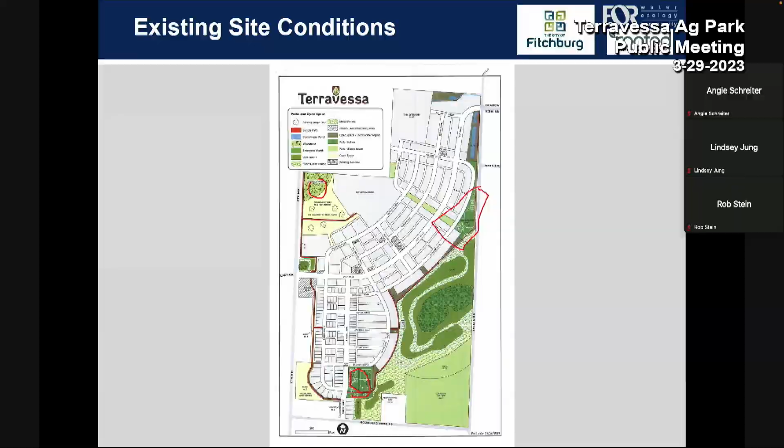We have a smaller neighborhood park down on the bottom, towards the south by Goodland Road. There's a sliver along Larson Road up there. We have a natural area adjacent to the west of the school. And the area we're speaking about specifically is down in the southeast corner, which is our future agricultural park — a unique feature. So hopefully that gave you an overview of the park system, where we're at, and what this presentation will be about tonight.

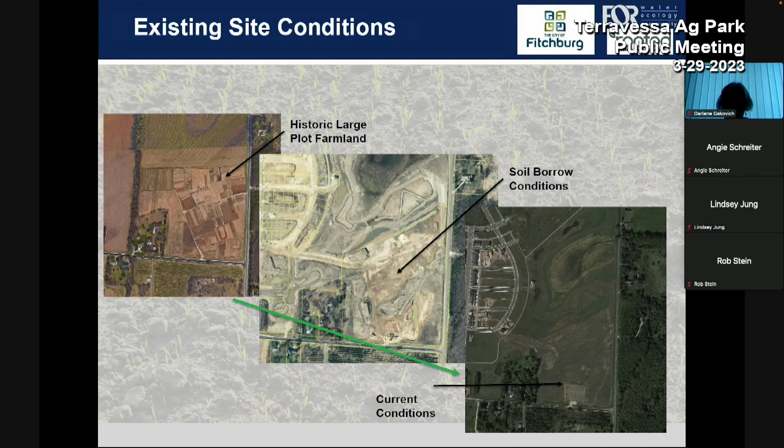On the slide here, you can see the progression—I apologize, it's a little muddy—but you can see the historic large plot farms that were there originally, then the development started, and now it's at a stabilized point where it's been planted, and some of those restored native areas have already been seeded and taken into place.

You can see that from this aerial here, and I'll try to outline it. Much of the borrow area was this portion of the site, and some of the more undisturbed areas would be defined by that space on the more edges of the site. That plays into how we planned the design as we went forward.

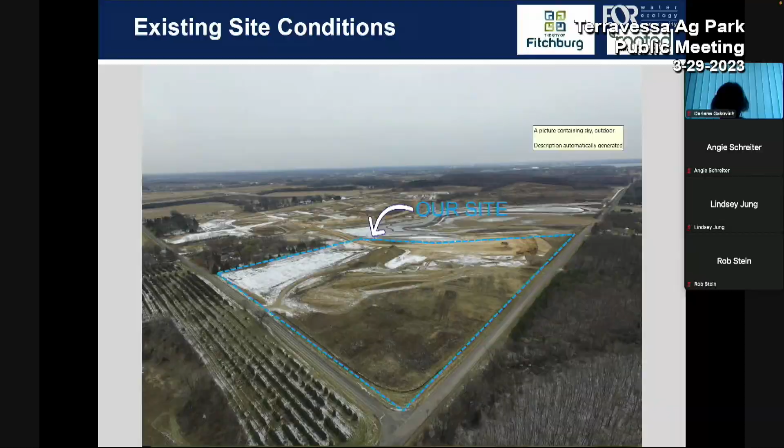This is up by the school, looking south on the site. This was taken last winter, just to give a little context of the natural beauty of the site. The intent of this park—chief among them is to provide produce and growing opportunities for the community—but it also has the opportunity to fit into a neighborhood and offer multiple benefits. So we tried to maximize what this park could be, as added benefits outside of agricultural production.

So where we are now is we met late in 2022, and had a kickoff meeting where we introduced the site and talked more about what an agricultural park could be. Depending on the site, the community, and the needs, it can be a lot of things. But we got a lot of feedback at that meeting, and there was a lot of support, which was nice to see from the community.

We took that information and started developing concepts of what the site could be physically laid out to look like. A couple of things when we went into this process—we're in the concept development stage right now. It's a study of design alternatives, which you can see up here on the boards, and we'll get more in depth in a few slides.

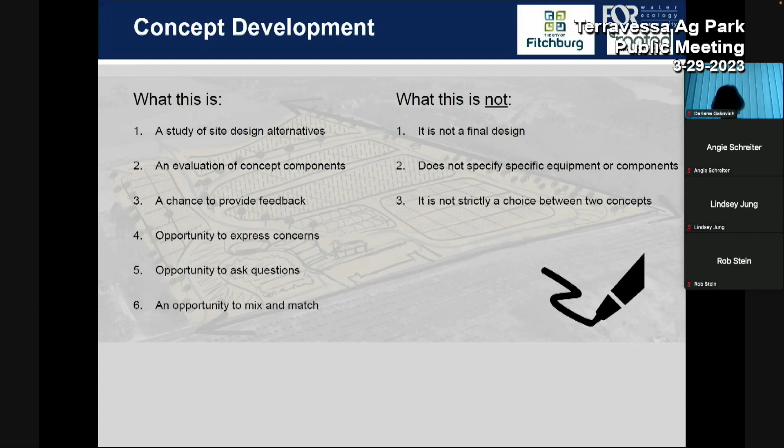The final master plan will be a roadmap—I always say that in these meetings. It's going to be your navigation system, your Google Maps. It really just gives you a map of where to start and get these things implemented into the community. It doesn't specify specific equipment.

In some of the imagery, you'll see play equipment, a shelter, or a water source—those aren't specifically specified at this point. That comes later down the line, in the implementation stage, when you start getting down to the nuts and bolts of road surfacing, parking opportunities, and so on. And like I said, it's not a strict choice between one or the other.

Some of the parameters of design focus within the property lines of this lot, but looking at the connectivity and how it integrates within the park system was also taken into account, and how we can maximize those connections and be part of that system. It's not a standalone thing, it's part of a park system, so we look at the opportunities with that.

It's anticipated that this will be a phased project. Depending on funds and demands, those are the sorts of things that will dictate how aggressive the implementation of a park like this would be put into place.

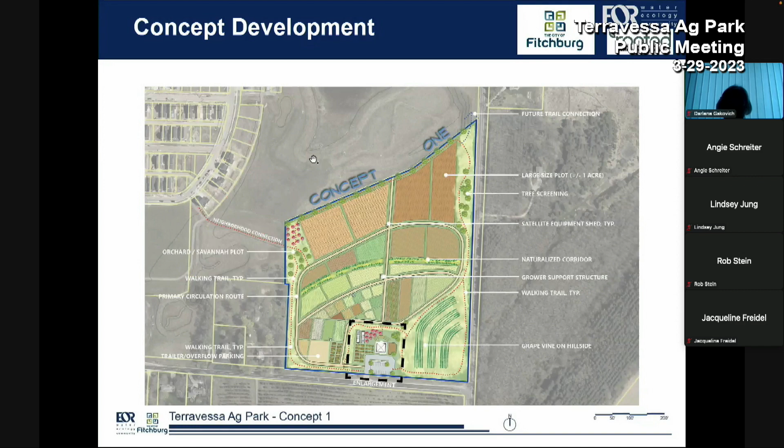Okay, with that, I'm going to zoom in here. So this is that hub area, our entrance off the main road there. In this concept, you'll see we'll have a dedicated parking lot and also a drop-off, maybe a bus parking area over on the right-hand side. I'll do my best to scribble on this as we go.

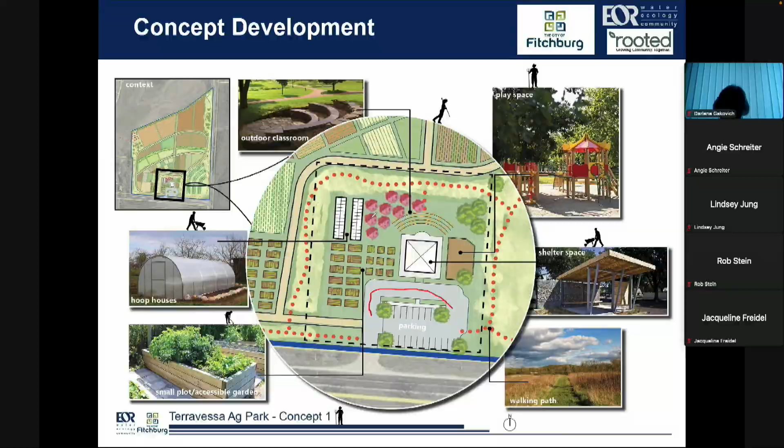And then that kind of has this roundabout circulation that services this main gathering shelter space. Again, what that is, is a little bit unknown, but it has the potential to be restrooms, or restroom screenings for more portable restroom functions. Certainly covered to host picnicking or other community-sponsored events, educational opportunities.

Talking about those views going this way, we have an informal, naturalized seating area backdropped by fruiting trees and nutting trees, which really sets a beautiful scene. I have some imagery further on in the presentation that will help you get a better understanding of the scale of this site.

It's kind of hard looking at a plan like this to really gauge what does that look like, how much room do we really have out there. So that's forthcoming. That's a teaser, so you can't leave the meeting early.

And this is kind of that phase one opportunity for agricultural use in this space. It's the low-hanging fruit, pun intended. You can have accessible plots, 10 by 20 in-ground plots that are easy to get to, and it's just a continuation of some of the community gardens you have in other park spaces. It would be a similar function to that.

And then a space for hoop houses and a play space. We'll talk a little bit more about what that could be, but it's seen as kind of this hub of activity. So this is an agricultural park, we're certainly going to have that component.

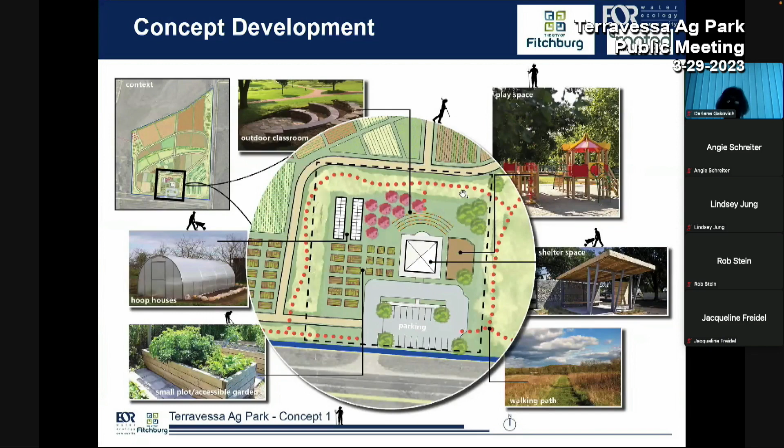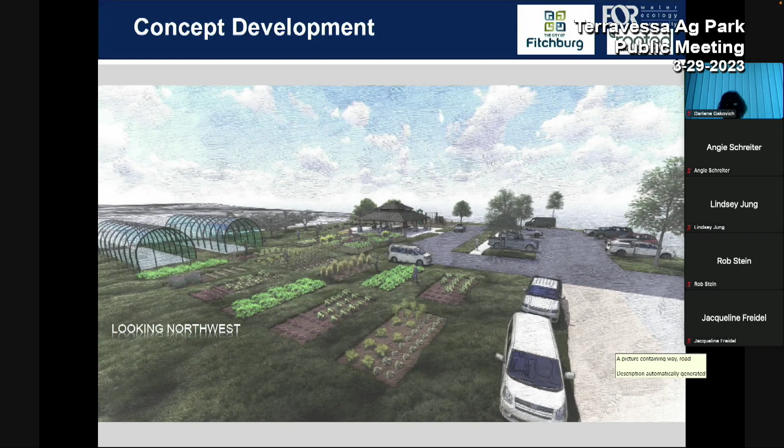And if I might, that area is about an acre in size, just for reference. That plateau or area at the front is about an acre in size, so that gives you a little bit of reference.

Oh, you want? For those in the room, it's up to you.

We've got an online question, Rob: are there any anticipated differences on impact of wildlife between the two concepts?

The main difference would be in concept 2 is there's more dedicated native restoration areas, so they would provide more pollinator habitat and native species diversity.

That would be the main difference that I can think of off the top of my head.

Both kind of maintain that low point where it probably wouldn't be that desirable for agricultural production, and I think you'd have opportunities to introduce wetland species, and then you might actually start to see more bugs and bunnies that like their feet wet.

If you look at the Terravessa Park Master Plan going to the north, the area we're talking about is maybe a third the size of the natural stormwater type environment to the north. So there certainly is a lot of opportunities further north for wildlife and those things.

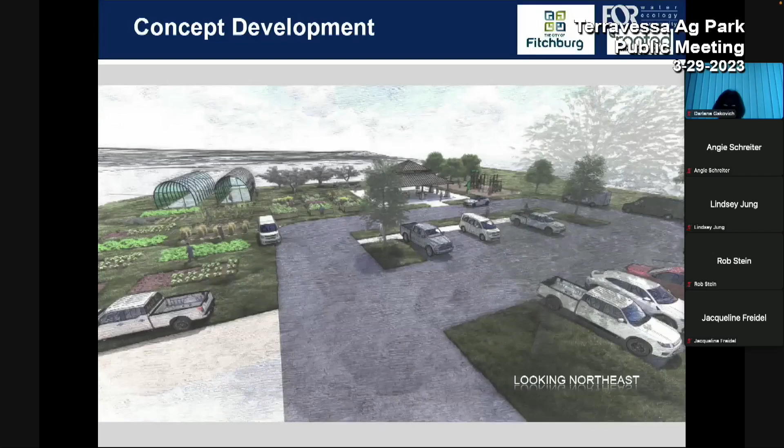Park looking northeast. Is that right? Yeah. Kind of see how, with some context with some vehicles in there, people, how the site kind of comes alive.

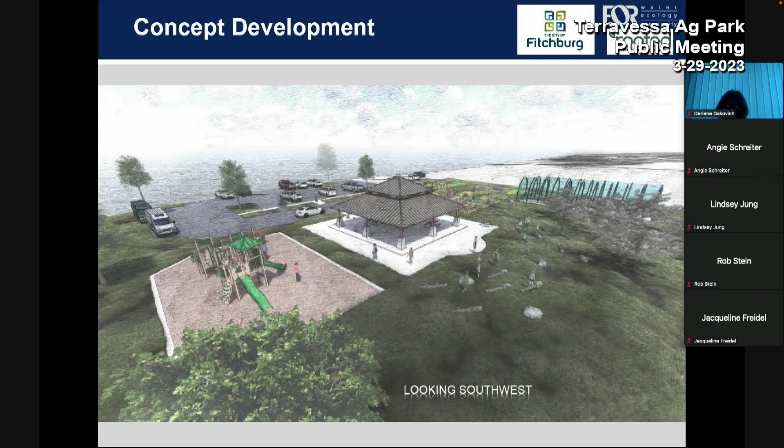And this is looking southwest, back towards the road and the access point. Again, I don't want people to get too hung up on the play equipment and what this is not. This is not specific equipment. This is more to illustrate a play space, and what that becomes is yet to be determined.

Same for the shelter. Is that going to have an enclosed room? Is it going to have maintenance? Is it going to have other facilities and amenities? Right now we're earmarking it as an open-air shelter gathering space that, in this sense, is the foreground for this big view to the north.

And this is the second concept. This takes the patterns of the second concept and has that more radiating pattern. I'm a little elevated here, but for those that have been out there, you do get a view. It does lay out the land before you.

Just to give you a sense, I put trucks, vans, and people pulling off to the side. So once on the site, you don't need dedicated parking.

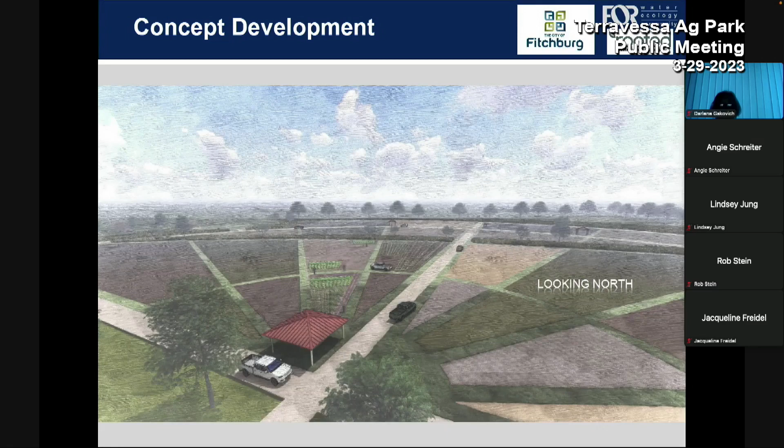People are going to just pull off, and it has to be convenient. Otherwise, it's not going to be usable.

As we hone in and develop this final master plan, some considerations we'll have to think about: what do you prefer? Would you want an aggregate path or mowed paths? Do you want an asphalt parking lot or more gravel? Opportunity for solar versus just on the grid.

Nature play versus more traditional. Outhouses versus something more substantial and plumbed. Cistern water harvesting.

Oh, the stuff just chokes me up. Okay.

One thing, before we started the meeting, the discussion of water came up, and that was discussed in the first meeting, and it's worth noting now. Water considerations - there would be water here.

When the Terravessa neighborhood was planned, if you go back here, there's an outlot where my cursor is that is park space. Water supply was stubbed into that, thinking this would be the supply for the agricultural park. There is no water coming off of the southern road there.

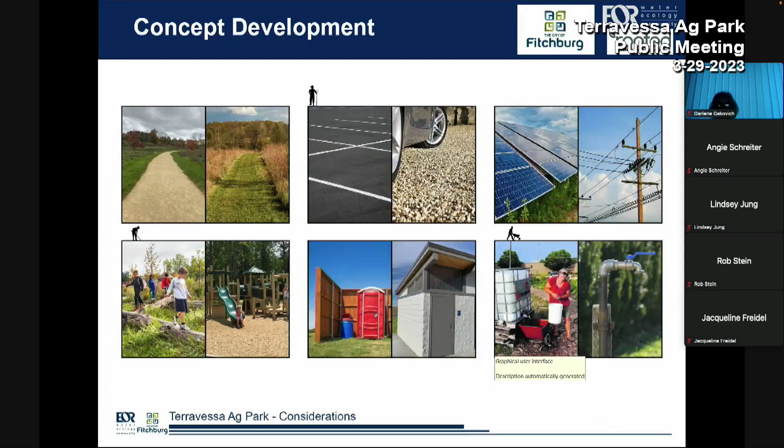Okay, so those are a few of the considerations. You have an online question? Just pause and see what that is.

Yes, we have a couple questions online. Let me read those.

Wondering, has there been any discussion about pet waste garbage cans along the trails? Not sure who would manage that, but something to consider. Many dogs in this neighborhood and poop along the paths already. I imagine we'll see it there too.

Fair comment, I bet you would. And thank you to the person who posed that question.

Specifically, no, we have not given consideration to that, but we are keeping notes of all this stuff, and that's a real obvious recommendation that we would have. I don't know if that would be shown on the master plan, but it's a small detail, and I'm glad someone mentioned it.

At McKee, we do have a pet waste station because that's one of our community parks. I certainly would see that this potentially could have the same types of amenities to provide service for that. Sure. Another thought - is there any opportunity for public art somewhere?

I think certainly in the shelter, or potentially even on the pavement or whatever spaces might be available.

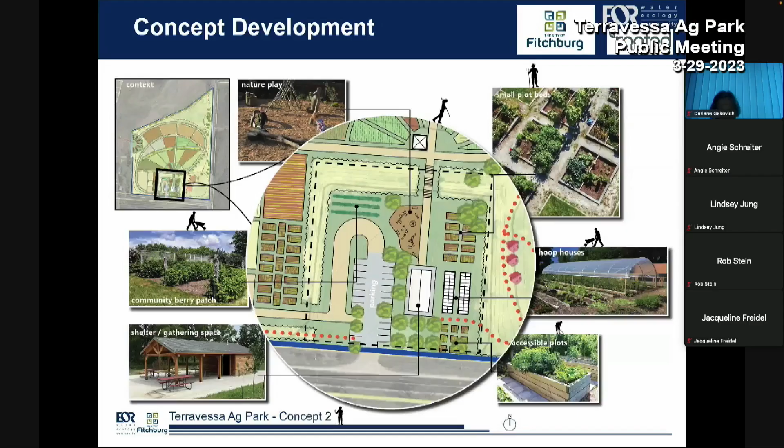I'm more familiar with small individual community garden plots, but here there are many really large areas. Who are the intended users of the large areas? Scott, do you want to handle that? Well, we've got Rooted, who's the expert in that area, in that circle if you would, and hopefully they can give us some insight as to how many customers we may have for these larger plots.

And then the large plots - I have a waiting list, definitely. Maybe not so much with Fitchburg residents, but definitely outside of Fitchburg residents, if you're welcoming to any growers in particular, there's no issue filling up the big plots at all.

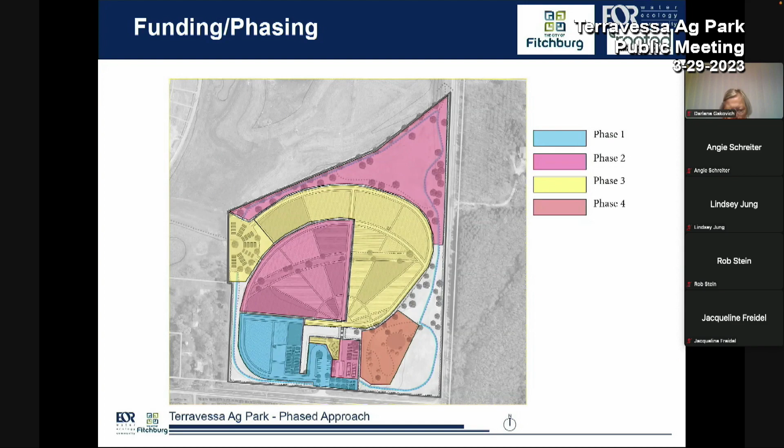Then you maybe add shelter space, a play space, and expand the growing as it goes, and it keeps going from there, as you can see. Some of those elements are more targeted, and Scott can talk about funding through CIP, grants, and targeted fundraising.

The implementation or phasing would really be the Park Commission's responsibility for making those types of decisions. We've got the current CIP - in 2023, we've got a park ID sign and then also the parking lot. In 2024, we're looking at doing phase 1 of the park, and then in 2025, we're looking to do phase 2.

The funding source would be through parkland dedication fees. When a developer or development comes within the community, there's two fees they pay. They either give us parkland or fee in lieu of parkland, and then they also give us park improvement fees. So the development of this park would be solely from those fees, not tax dollars.

But certainly the operation of this facility would come from the operating budget, since there's people that need to mow and do those kinds of things. I'm really thinking that at some point, the park staff will need some help managing the community gardens that we have currently within our park system. And as we add a system like this, we're going to want professionals managing and maintaining it so we have the best fruit possible. That would need to be in the operational budget, which goes into the general budget for operations.